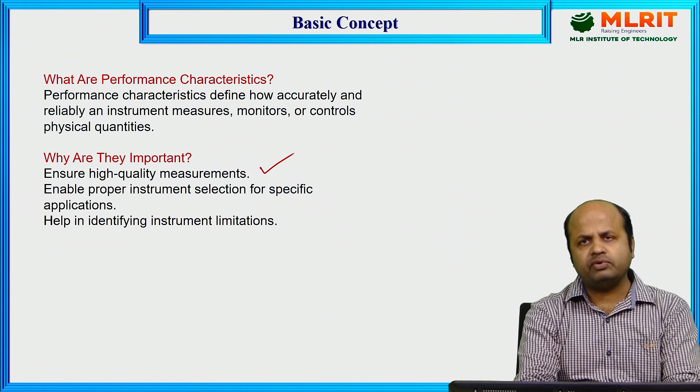Classification. Performance characteristics have been classified under static and dynamic. Static means the performance measured under steady state condition, that is called static characteristics. If the performance of an instrument is measured under changing input conditions, it is termed dynamic characteristics. So both characteristics are very important.

So static characteristics means the performance of an instrument measured under steady state condition, and dynamic characteristics means performance measured under changing input condition. These two things we will take in detail. Under static characteristics, we will see accuracy, precision, sensitivity, linearity, range of an instrument, resolution of an instrument, everything we will discuss in detail.

In dynamic, we will see the response time of an instrument. Then we will see the fidelity of an instrument, dynamic error, and speed of response. These are some of the parameters under the dynamic characteristics, and these parameters are under static characteristics. So in order to judge the performance of an instrument, we have to analyze both static as well as dynamic characteristics. Then only we can decide whether an instrument is reliable or not.

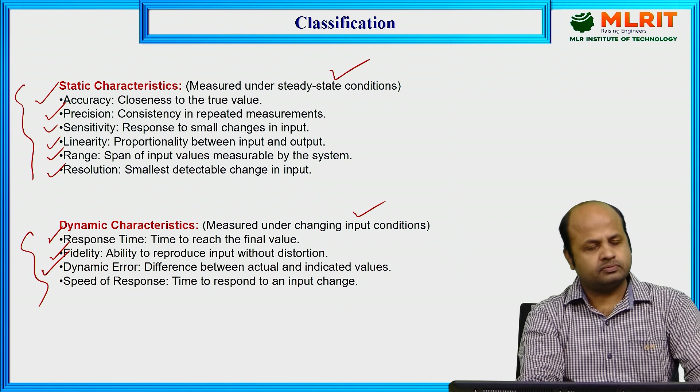Here we will see the key elements for performance evaluation. First is the input source. It provides the physical quantity to be measured. Then the measurement device, instrument or sensor to capture the data. Then we will have the standard reference, benchmark for calibration and comparison.

Then we also have to consider environmental considerations. What is the effect of temperature, pressure and humidity on the performance of an instrument? So these are some of the key elements for performance evaluation.

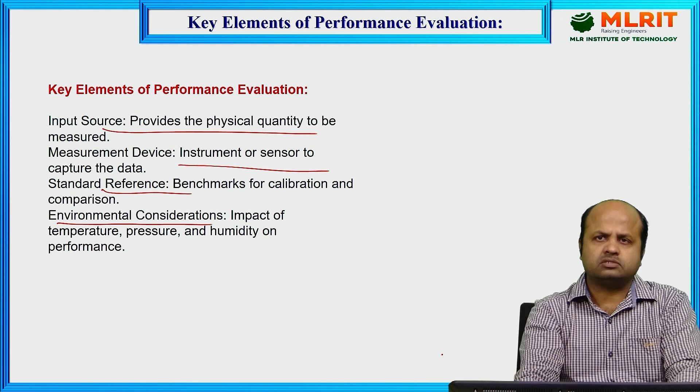So first of all, we would like to see the static characteristics. Already I discussed, the performance characteristics of an instrument can be categorized under static and dynamic. Static consists of finding the accuracy of an instrument, how close the measurement is to the exact value. The degree of closeness of the measured value with respect to the standard or exact value, that is called accuracy.

Precision. Precision means repeatability of the measuring instrument. Suppose we are measuring something and we repeat the same process again, and we are getting the same value, it means the instrument is 100% precise. That is the meaning of precision. Sensitivity, the output change with respect to input, that is sensitivity.

Linearity, this is a very important parameter. As I discussed in previous lectures, linearity of an instrument is very essential. Why? Linearity denotes that there should be a linear relationship between input and output change. If it is varying non-linearly, then it is very difficult to predict the behavior of an instrument.

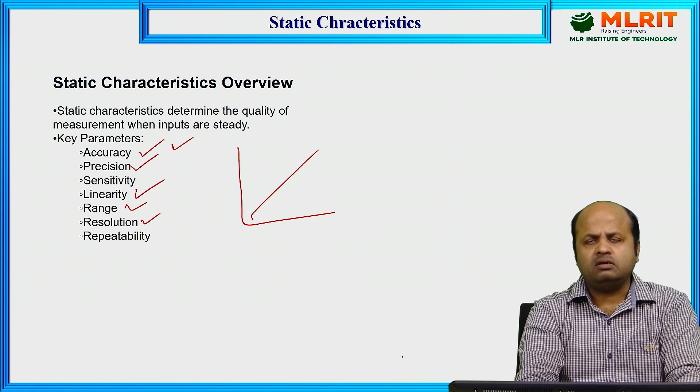So before purchasing any equipment, we have to go through the data sheet to have an overview of its static characteristics. If it is okay and it is within your working limit, then you can go for the purchase of that instrument based on the static characteristics.

Already I told what is under static characteristics. What is accuracy? The closeness to the true value, that is accuracy. Precision, the consistency in repeated measurement. Sensitivity, the instrument's ability to detect small input, that is called sensitivity of an instrument. Linearity, already I discussed.

Proportional between input and output, that is called linearity. Ideal case, it should be a straight line. If it is a straight line, that means that instrument is perfectly linear and it will give the accurate result.

Range, the maximum and minimum value that instrument can measure. Resolution, already I discussed, this is the smallest change in input that instrument can detect. Repeatability means the consistency of an instrument to be measured under the same condition. So these are some of the parameters under static characteristics.

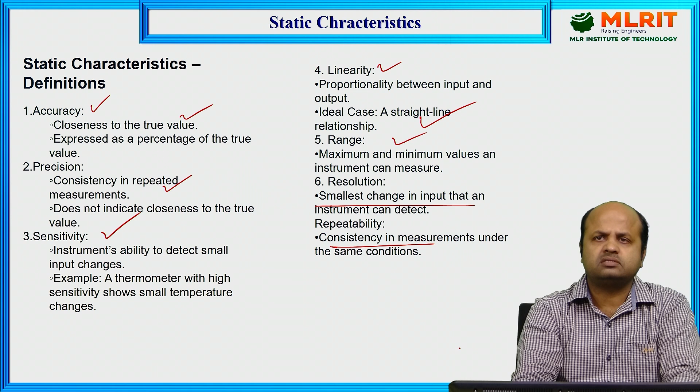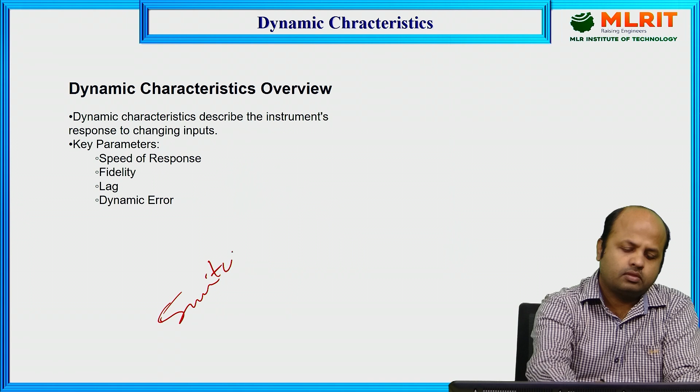Dynamic characteristics. Already I told dynamic characteristics is when it will be non-steady condition. The measurement of an instrument under non-steady condition, that will be a dynamic characteristic. Already we know whenever we switch on any appliances, it does not go immediately to the steady condition. First it will rise slowly, then it will get settled down to the steady condition. So before getting steady condition, it has to undergo non-steady condition, which is also called dynamic behavior of an instrument.

Suppose when we switch on the fan, it does not go to the high speed at a moment. It goes slowly and then reaches the high speed. Like that, any instrument, whenever it is switched on, it first shows the dynamic behavior for some time. After some time, it gets settled down. That settled down performance will come under static characteristics, and this will come under dynamic characteristics.

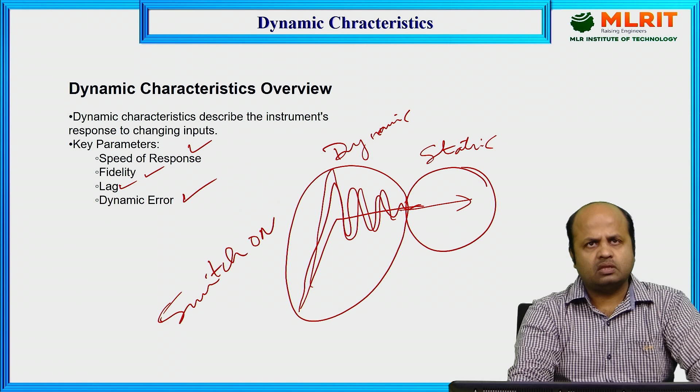Under dynamic characteristics, we will study about the speed of response. Then we'll have fidelity. Then we have lag. Finally, dynamic error. These all parameters we will study one by one. Dynamic characteristics, speed of response. The time taken to respond to an input change is called speed of response. For a good instrument, the speed of response should be very high.

Fidelity, ability to reproduce the input signal without a distortion. So fidelity of an instrument is very important to study. As we know, any electronic component has some parasitic resistance, parasitic capacitance, this important term, which causes the distortion of a signal. So we can't eliminate it to 0%, but we can minimize it by optimizing the circuit design and other things. So fidelity is the ability to reproduce the input signal without distortion.

So here we have to understand how the distortion is caused by the instrument. Distortion of an instrument is basically caused by its parasitic capacitance or resistance inside the circuitry. Every circuit has some parasitic resistance and capacitance.

Lag. Third and important parameter is lag. The time delay between input application and response. Suppose if you are giving the input at time t equal to 0, it will take some time to reach the desired node point. Why is this happening? This is also due to these parasitic elements, because in any circuitry we have to assume that there is some parasitic capacitance and resistance. So whenever you give some input signal, this capacitor will try to block the input and it will slowly show the rise of the signal. So delay is due to the parasitic capacitance.

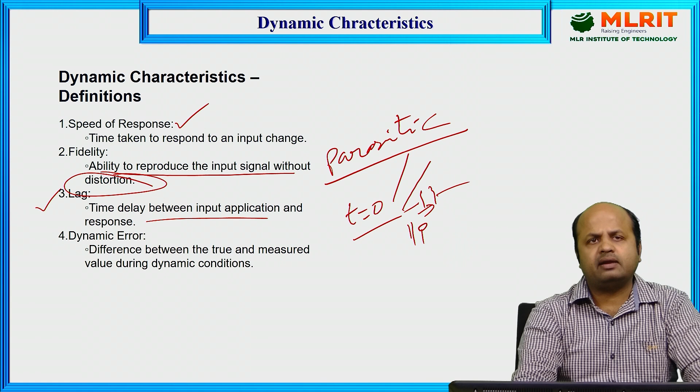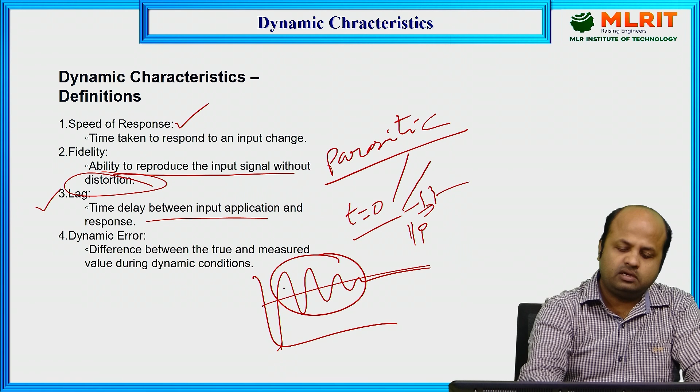Dynamic error. Difference between the true and measured value under the dynamic condition. Already I discussed. Suppose this is the true value, and if you are measuring this error, it will come under dynamic condition.

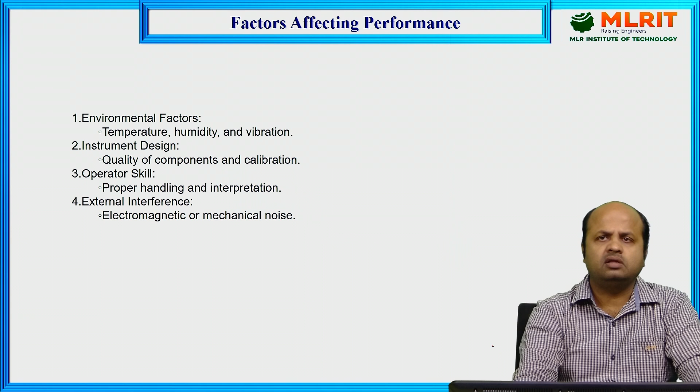Factors affecting the performance of an instrument. What are the factors that affect the performance of an instrument? We have environmental factors, which consist of temperature, humidity, vibrations, etc. Then we have instrument design, quality of components, calibrations. Then we have operator skill; proper handling and interpretation is very important. External interference, electromagnetic or mechanical noise. These all 4 parameters will affect the performance of an instrument.

Performance characteristics in action. So we will take some examples. Suppose thermometer. Accuracy in measuring the body temperature. Dynamic characteristics is its speed of response to sudden temperature changes. From this example, we will try to understand what is static characteristics and dynamic characteristics.

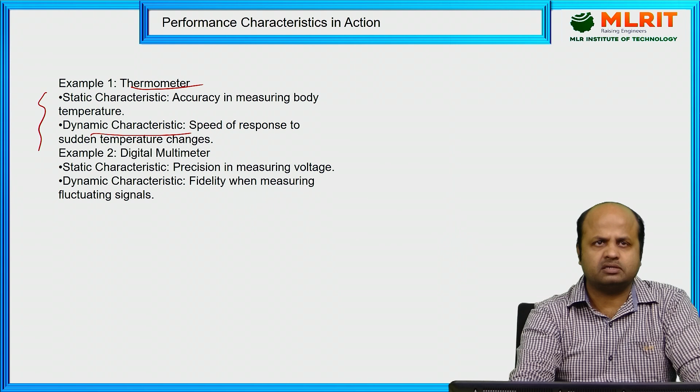Static means it will show the accuracy in measuring the temperature. That is the characteristic of a thermometer. We are purchasing a thermometer to indicate the temperature. So how accurately it is showing, that will come under static characteristics. And suppose the temperature of the body suddenly changes, and accordingly our display should also get updated. So speed of response will come under dynamic characteristics.

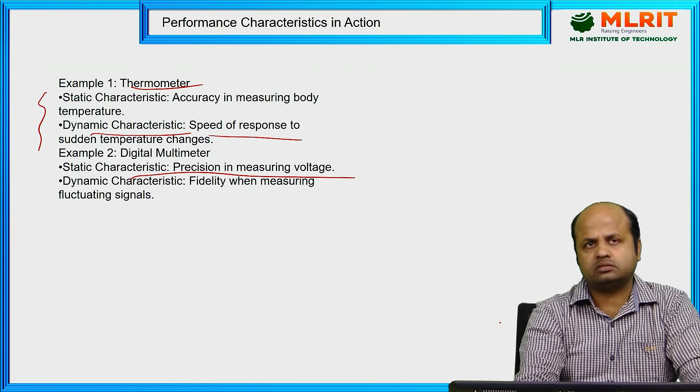Like that, digital multimeter. Static characteristics will be precision in measuring voltage. Dynamic will be fidelity when measuring fluctuating signals. So in the multimeter also we will try to understand 2 cases. First is static characteristics, which shows the precision in measuring the voltage, and second is dynamic characteristics, which shows the fidelity when measuring the fluctuating signal. Dynamic always indicates some fluctuating signal or change in input. These all will come under dynamic characteristics.

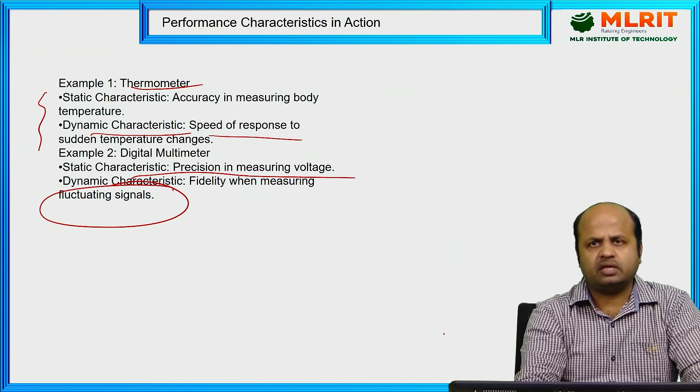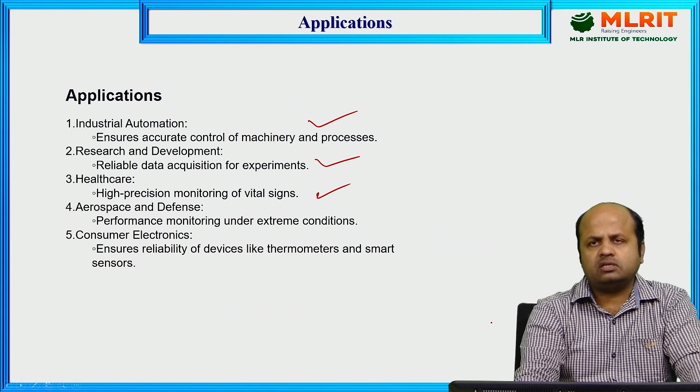Application. Already I told that performance characteristics is very important, and it ensures the accurate control of machinery and processes. It ensures reliable data acquisition for experiments. It ensures high precision monitoring of vital signs. It ensures performance monitoring under extreme conditions. It ensures the reliability of devices like thermometers, smart sensors, etc. So this was an overview of the performance characteristics of an instrument.